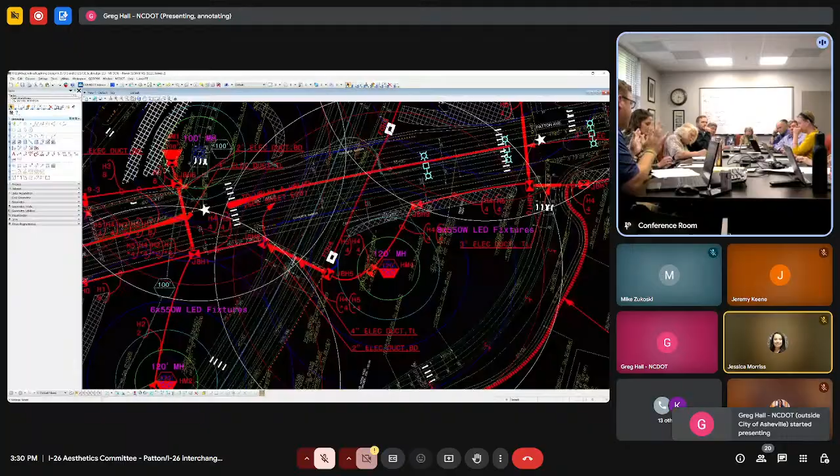We're continuing to follow up with U.S. Fish and Wildlife just to make sure, from an environmental perspective. I think we are agreeable to remove them, but I wanted to let you look at them before we did, because there's a factor if they do shed light on the MUP.

If you close your people box, it might make that one bigger. Okay.

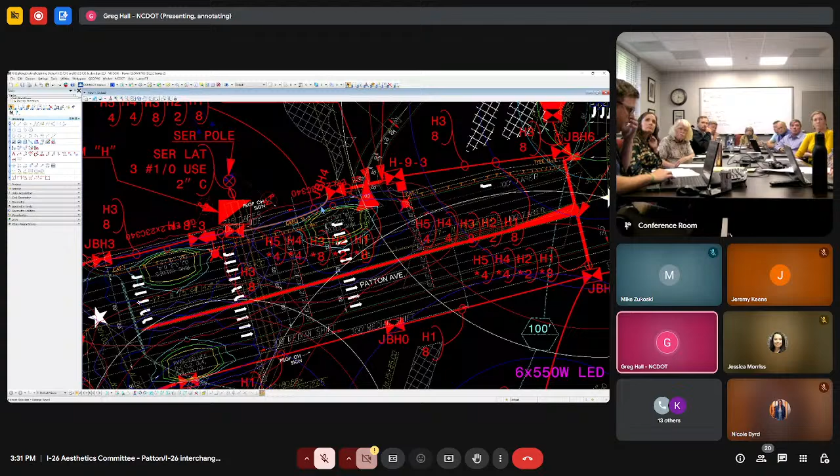So what we're looking at here with the round circles, those are the templates for the light patterns from the high mast poles. The oblong looking templates are for the single arm poles, the 45-foot ones that we're able to use. We have to use the shorter ones with a different pattern over near the French Broad.

Not there, but when we get on French Broad, or when we get off the screen up here. This gives you an idea of where the light's going to fall using the high mast poles. So I think the point of letting you see this is just to show that area of effect. It's isolated within the MUP.

Again, to the commitments that we have, we are open to removing those and going back to the single arm and double arm, which would be placed on either the shoulder of the road or the median, which would isolate the lighting to just the roadway itself, consistent with the rest of the project. Those are the poles painted green in the original scenario.

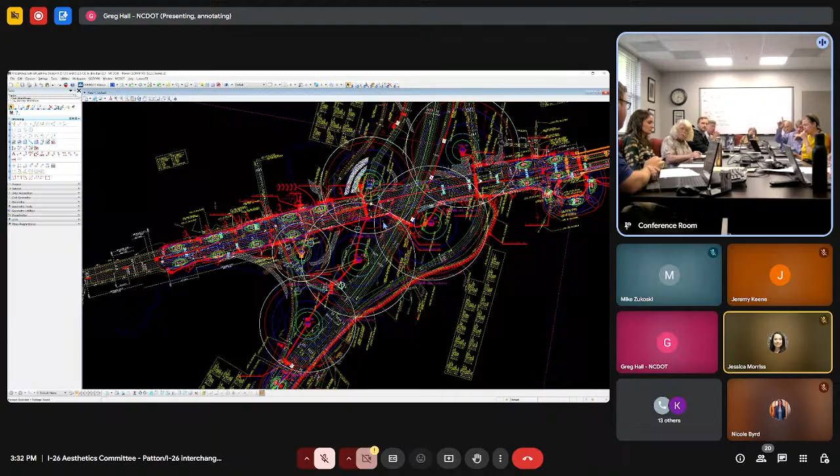So we're good. Based off the conversation last week, it sounded like the direction was away from the high mast, but I wanted to at least show this screen and the level of light as we moved into the MUP lighting conversations. That was our recommendation in the final report from our original study, to eliminate any high mast lighting where we could, preferably everywhere.

And I think that recommendation would probably still hold with our committee throughout the project, whether the bridge is under, over, whatever. I understand what you're saying about the MUP, but elsewhere in the MUP, we don't have high mast lighting. Correct. And, I mean, where do you draw the line?

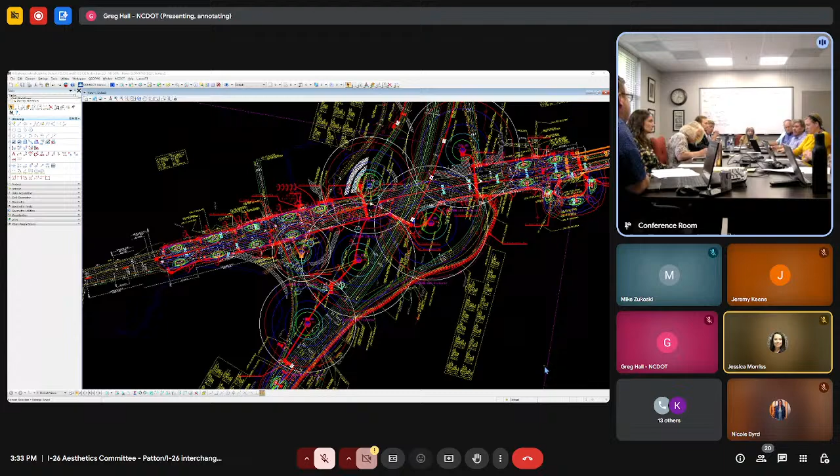Just to understand, that was a question I had reading the report from 2023. The MUP was lit with fancy Macintosh lights every 110 feet. So I saw that, and I thought, well, is that gone? Is that still in? Because that's lighting for the MUP, separate from this discussion.

Greg, can you outline where that MUP lighting is and isn't?

Yeah, so what we had done here, this thick red dashed line is where we were putting conduit in along the MUP for the future lighting you're speaking about. The MUP that was going along up here within the interchange, we weren't going to do separate lighting for that because it would have been lit with the interchange lighting.

Now, under the structure, we would have to put some lights under there to be able to light the MUP. But outside of the structure, the interchange lighting would have been sufficient for it, and likely still would be sufficient when we switch this to singles.

So the lighting and the conduit currently would be in the greenway that goes from Patton to Haywood. Currently in the plan, we're not showing it continue along Patton. We could — that's again a recommendation we can consider from the committee.

No, I'm just thinking, there's that paragraph in the 2023 report that simply says the MUP is lit with poles every 110 feet with fancy nice lights. And it doesn't say where, it just says that. Right, it's specific to that one.

And again, from an agreement standpoint, it's a municipal agreement — conduit under the project, and then lights later by the city in agreement with Duke. Yeah, I heard the word future lighting. So those are the Duke installed, maintained ones.

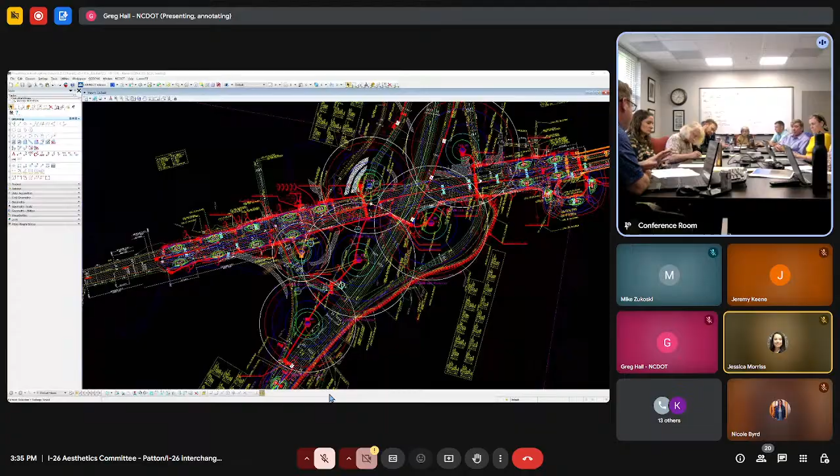There is lighting currently planned on the structure itself underneath for the roadway. We've evaluated from the department perspective, we can install that same lighting back to the MUP and the sidewalk on either side.

Greg, do you want to show what those lights look like? I can, give me just a second. I actually had closed that file by accident, I'll have to get it pulled back up. We can show you what that standard looks like.

Those are the lights that would be attached to the cap of the structure itself. There are lights on the roadway side pointing to the roadway, but we can additionally include them on the MUP side. That is something the department, from a cost perspective, is willing to cover, so not something that would be affecting the budget. To get totally nerdy, those are surface mount high bay LEDs.

Okay, which I can't get nerdy with you, but Greg can. Have you had any experience? Some lighting people that knew what I was talking about. I would envision this something similar to what's under Broadway right now, Broadway and 26.

I think that's what we had talked about in these committee meetings prior, was using a similar fixture to what's there today. So what Nathan's talking about, we have the lights shining on the roadway now, and we would put on this side another luminaire opposite where these same three are to light the MUP that's going behind the structure or behind the pier.

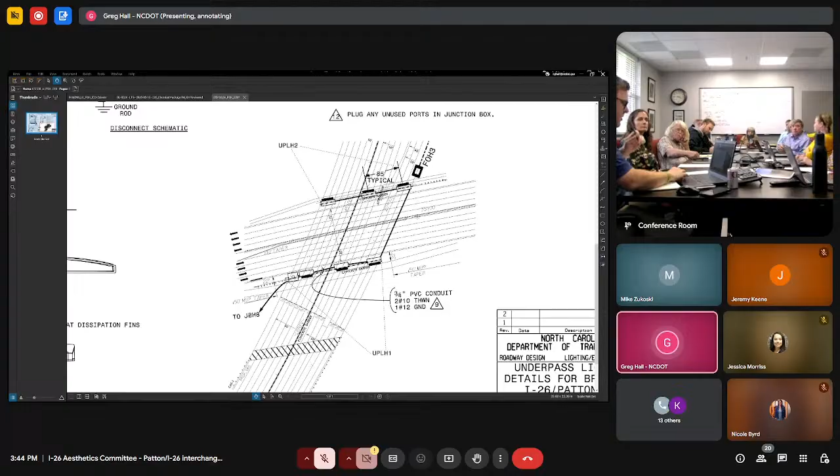And you saw an example in Charlotte. So I did—do you want to go there next? Any other questions on lighting? I have these pictures pulled up, Greg, that you sent me. I can take the screen, or if you've got the pictures handy, I'll let you show them—it'd probably be easier. Okay, I will take over.

This project was done back in 2012 that he's going to show, so it's been a little while. Things may have changed over time. I don't know if these are actually still in service or not, but they're still there. I can see in Google Maps that the lights themselves are still there.

But there's potential there, and these are color changing, so you could create a sense of place more than just high bay lighting. For sure. Although if they were red, they'd gain a reputation. That would be really silly.

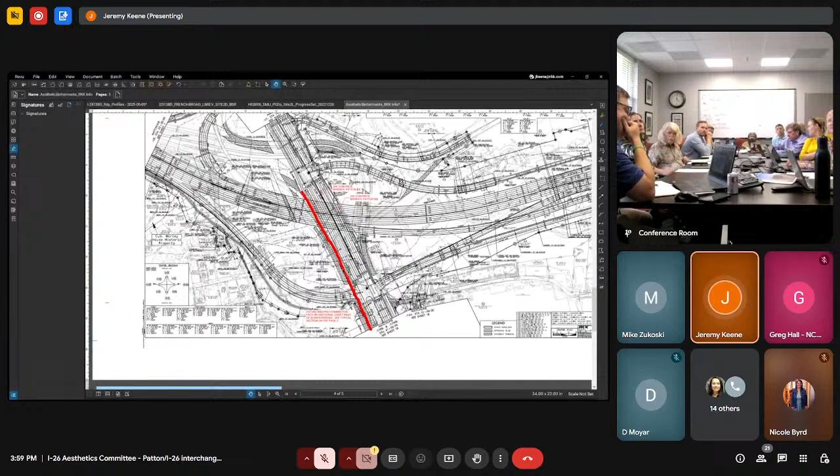The current plan shows a 14-foot MUP, and we're basically carrying an 18-foot from the western edge of the Bowen Bridges, and then carrying it westward across the ramp and then underneath the bridge, terminating it just prior to where the existing bridge is, where the Y7, the southbound ramp, ties in.

Again, when you get across these bridges, I think you're going to have a bigger effect, you're going to have to increase your fill to tie in this MUP to make this wider in here. So this was kind of a straightforward addition from this point back to the bridge.

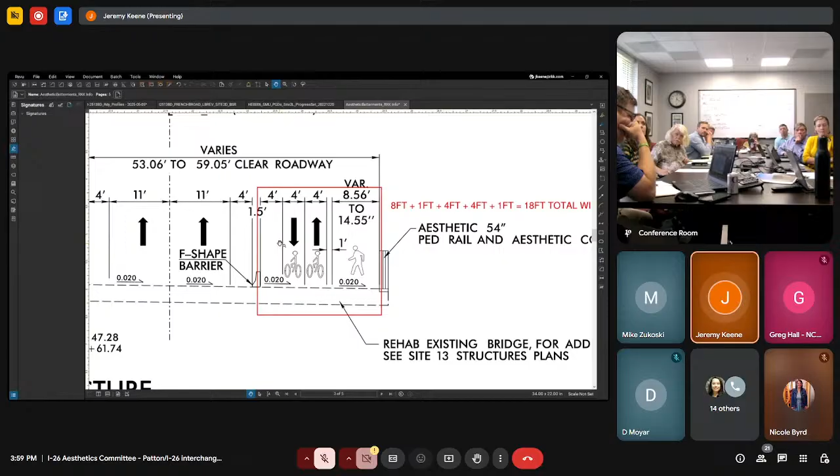Typical section, we were attempting to go basically just what you're seeing here. We're given an 8-foot pedestrian walkway, a 1-foot buffer between the peds and the bicyclists, carrying that 4-foot, 2 lanes, and then also a 1-foot shoulder beyond this outside lane. So that would be very similar typical section to what is on Bowen Bridges right now.

The planters don't show there. Planters will go on the opposite bridge over here.

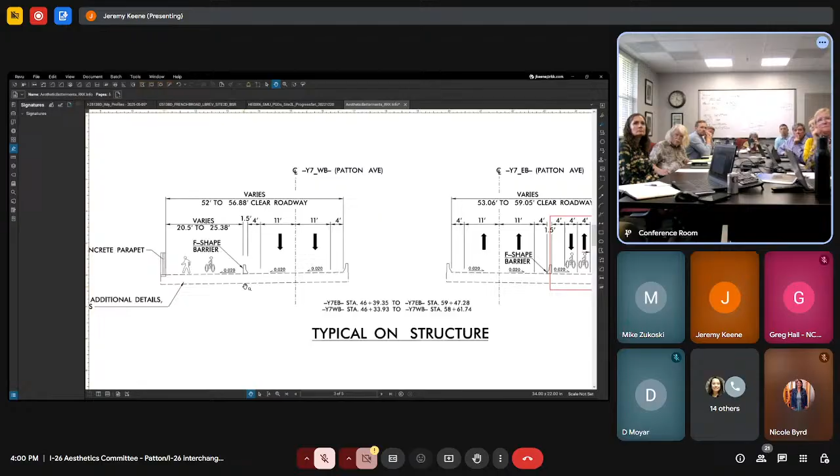So one is an MUP and one is a cycle track? It's the combination of both. So on one side, there is no cycle track. On the southern bridge is the MUP and the cycle track. On the southern side, there's no planters. On the northern side, there's planters. Correct, yes, okay.

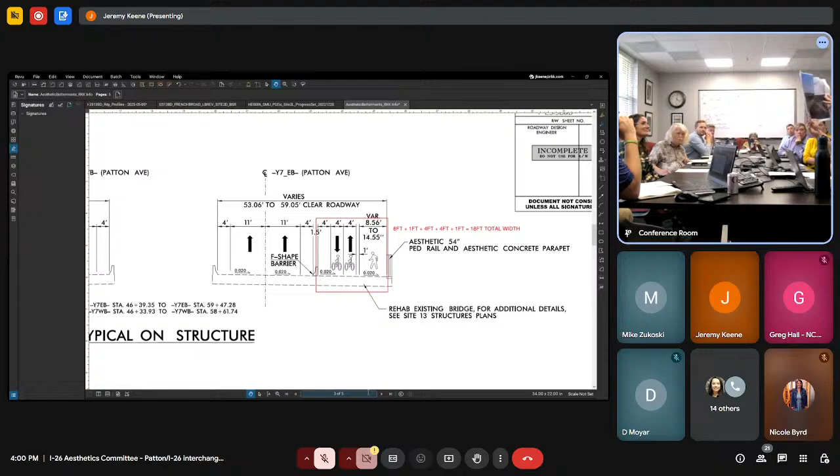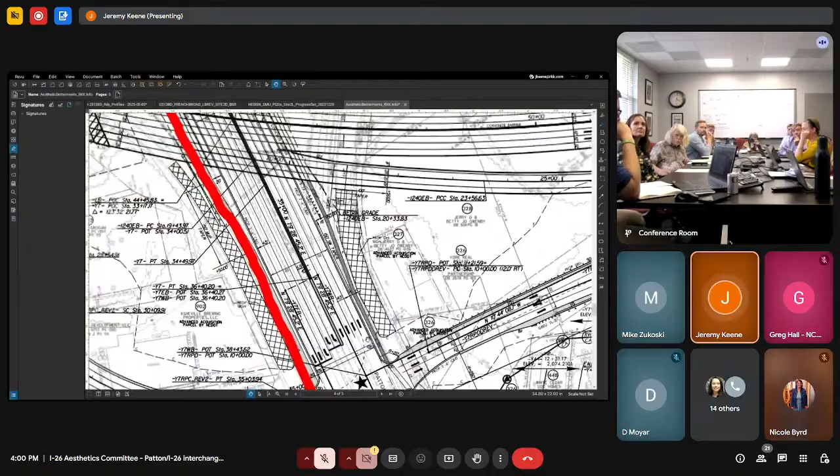And the width on the northern side is not 14 feet, or is it? So on the northern side, we have a 14-foot MUP coming off the bridge, and then coming off the Bowen Bridges, it transitions basically at the end of where Cliff Street currently is, and switches to a sidewalk running westward. So you can kind of see here, this is where our on-ramp is, and this is the transition from MUP to sidewalk.

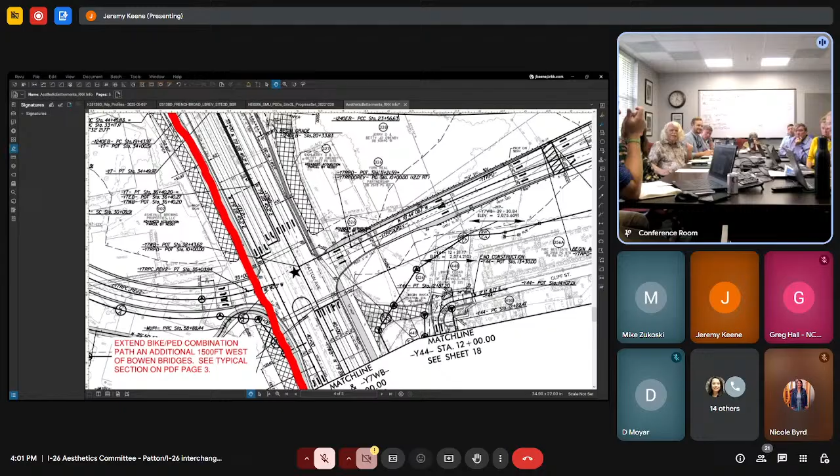So did you put a cost estimate together for that? We did. Do you want to know? That's what I had pulled up, but y'all wanted to see the express, it's just a number. Big number or little number? It's 275,000.

So there's a caveat to that. We're going to continue to evaluate that unless it's something the committee wants to move away from. What we still need to continue to verify is there will be potential utility impacts to that. Pushing that wider out will affect Duke's PUE, so we'll have to continue to chase that and make sure it doesn't impact anything additional. The length of that extension?

Jeremy, could you give us a length? 1,500 feet. Thank you. To end up where? It's to extend the 14-foot MUP out further to include the cycle track that's on the bridge, continuing the cross section on the Bowen bridges all the way through. Oh, I didn't think we had cycle track. It's not a full 24, I think they were showing 18, but I think that's what the estimate is. We could go, which is, we can maximize our width.

The idea comes back to taking the space available with this option with the bridge over, because the MUP is now under and not on top of the bridge, so we can make it wider with that space to extend the cycle track. That partly came from Mike's suggestion last week.

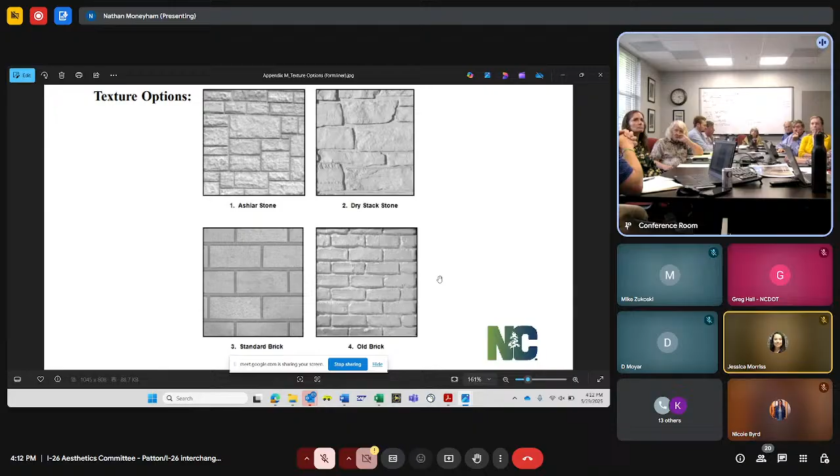From talking to our structures folks, there are all kinds, basically if it's available commercially, other patterns, and the chevrons mentioned last week, we can do that. But if there's additional cost associated with a specific pattern outside of our standard, we would have to split that out and talk about it as a betterment.

Doing one of these would move away from the idea that's been brainstormed of doing murals on these spaces, right? Because you wouldn't want art over these. We're talking about the columns though right now. So columns could, like on Lexington Avenue, those are on the columns. This would cancel out that option. Yes, and it could be a combination.

Again, that's our estimate, and we'll share this with the committee as far as we've got it broke down in portions. You could just do the barrier and not the columns, or just the cap and not the columns, or vice versa.

The columns, are we just talking about the facing part of the column having the formliner all the way around? For each of the columns or just the one? For each. For the barrier itself, we would just be looking at the outside that you would see from Patton.

And while we're talking about it here, we have another estimate, and I think this is maybe what will end up going back. What direction we need from the committee is what surfaces you'd want it on. We also have an additional estimate to do the non-traffic side of the barrier along Patton, this barrier here, so you could also include that on the back side, meaning the multi-use path or sidewalk side of those rails.

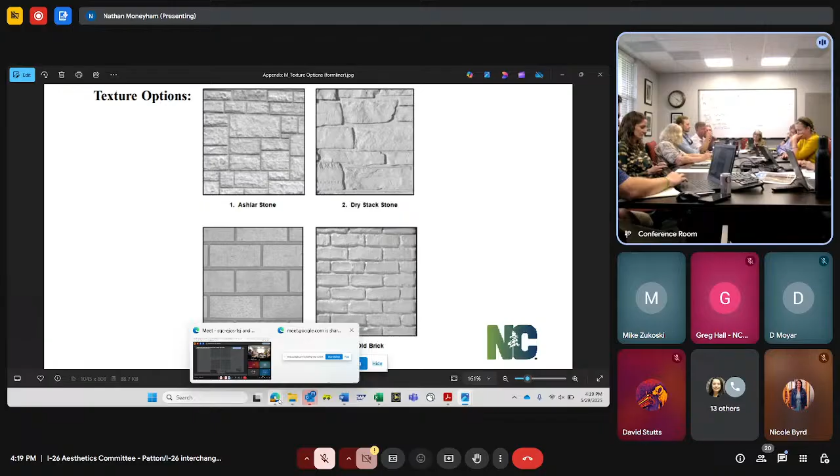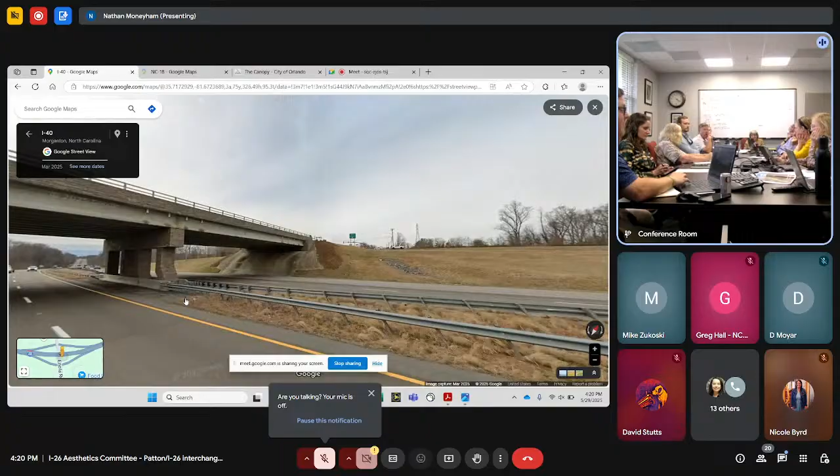So endless possibilities. I just Googled form liner and images, and there's a lot. Lots of really nice ones, but I guess some of these look really custom when they aren't. They're pretty standard off-the-shelf. There are thousands of off-the-shelf ones. From a cost perspective, we probably would not go that route, and we can start pricing it.

What's the view here? Not all of it has to be that way. What's visible is the girder. If you go back to the picture, what about the wall, the slant? The cap is nice but you don't see much of it. The column is nice, you don't see much of it. The main thing you see is the girder.

We've had extensive conversations about that in the committee, and the conclusion we arrived at is that particularly if we're using a form liner that mimics stonework, we want it to appear authentic, given that there are limitations to how authentic it can actually appear. If this were a bridge made out of actual stone, you would not see a span like that being constructed of stone. So what the committee has recommended is that the span remain plain concrete, and that only those elements of the bridge that one could conceive of being built with stone have the form liner application.

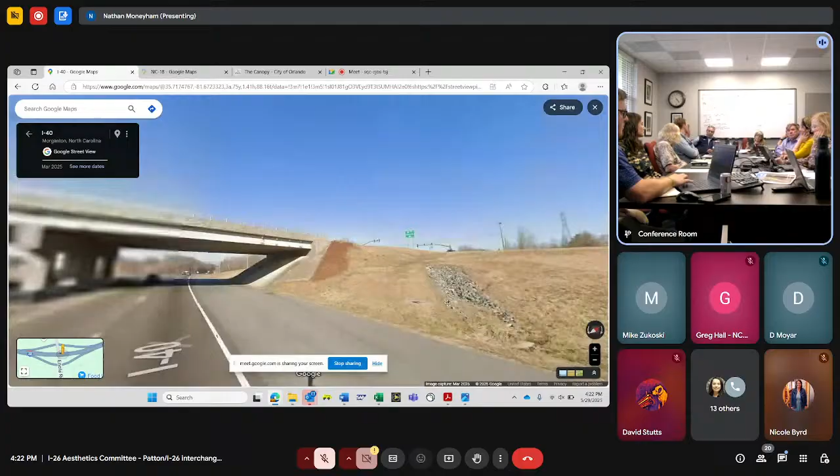And as this is the Patton Avenue Bridge coming into town, it may be that you don't go with a natural looking stone and go with something more urban. Maybe it's just shadow boxing in that upper rail, because you don't even have a rail on it to break up that surface—it's just a solid mass right now. If you did simple shadow boxing or picture framing, chevrons or something people talked about, because you also get to the bridge which has those Art Deco light elements. So if you played more with either a deco piece or even just simple shadow boxing, instead of going with something trying to be natural since you're getting closer to an urban environment, that might be something the aesthetics committee might want to look at.

Right, I think that's one of the challenges we're going to have—we're looking at all these different elements, but at some point we need to step back without getting into a lot of detail and say, what do we want that thing to really look like as you go through there? What's the general impression you want to make on people as they come through? The form liner, I think, is absolutely the right thing for the interstate, because that makes the kind of statement we want. Here, I think we're looking maybe at a different setting, a different situation along the lines of what you were just talking about, where it's a little bit more artistic.

So that would affect things, and it doesn't necessarily mean we have to have all the elements in place now, but at least if we could set it up so the city could add things later on, like an art wall or that kind of stuff. Begin to look at some of these elements in terms of a general concept of what kind of impression we want to make as you pass underneath that thing.

I think what I'd like to do is bring this back to our next meeting, so that the committee members and other stakeholders, if they wish to contribute, have some time to explore the options—both in terms of what kind of form liner we want, and the elements we want to see put on it. We may very well want to preserve some space that is not treated with form liner, so that we can do some public art there. So let's return to this at our next meeting. Okay.

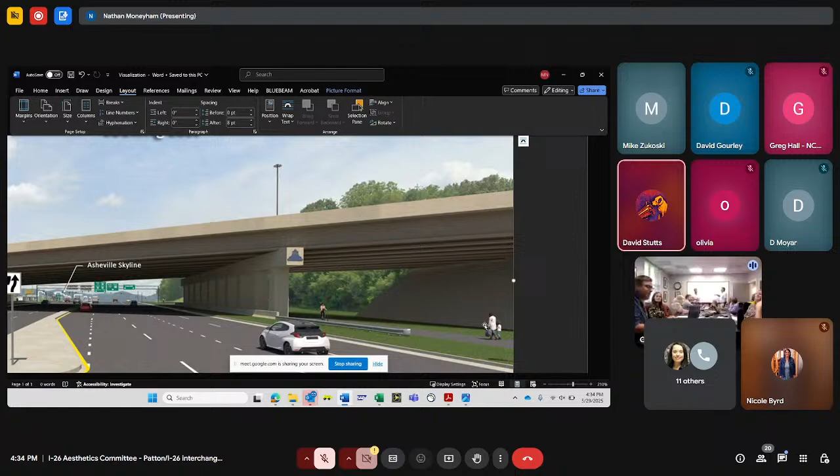Here they come. Okay, can y'all hear us online now? We had—there's a user error, not really a whole lot. Yeah, no, it's this whole face—on the height of the bridge, so it'd be this face that you would have.

Yeah, so underneath, just coming here—you've got this entire wall face under the bridge, whatever the bridge width is above it. You're talking not facing the traffic, the form liner, but under the bridge as the pedestrians would see it. Yes, pedestrians walk by and look to the right, or left in this case. Got it—so instead of this being angled, you're talking about pushing it back flat.

So I don't think we would want form liners there because we want to definitely preserve that space for public art. I'm just wondering what the research from other cities shows on the potential for use as a loitering space, an encampment, whatever, from having that additional space. I understand it could become an asset, but it could also just be more space for people to hang out and make others feel uncomfortable walking under the bridge. So I'm wondering what the research shows.

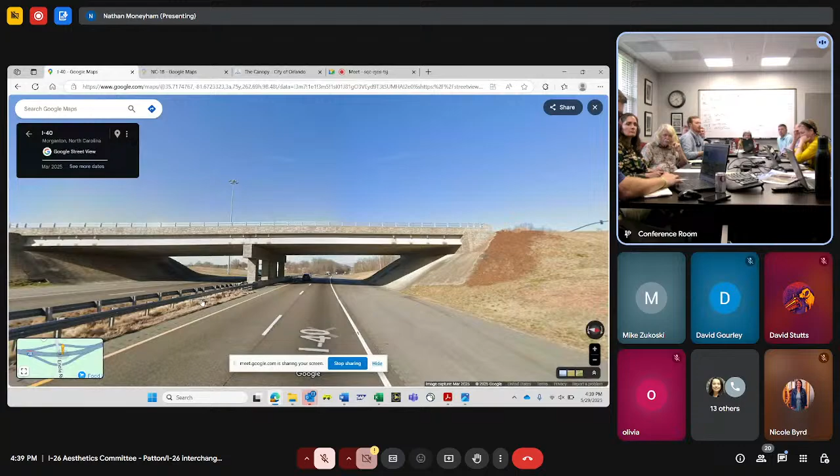There wasn't a significant ledge in your picture. There it is - there's an abutment where the beams sit, and it probably sticks out like 2 or 3 feet past where that is. And then there's a ditch, so you've got drainage purposes - you gotta drain the water, a couple feet in between the face of that wall.

And then I went back in time - there you go, there we go. So this is a combination where you've got both, kind of a split wall. In the case we're talking about, we would take it all the way down. And again, the panel size could vary, but you see there's a ledge with a ditch.

But it looks like the only accessible way to it is from the top or with like a grappling hook or something. Sure, not easily accessible. I'm sure if APD was here, they would say there are certainly somebody industrious will get out.

But I think Sonia's point is really good, like what's to say they're not just going to camp on this now, really wide area that's still there unless we come up with activation ideas. But I do think there's value to the straight up and down if we can claim more space for people to be activated. Correct me if I'm wrong, but would most of that space be the cycle, if we went with the cycle track plus multi-use path?

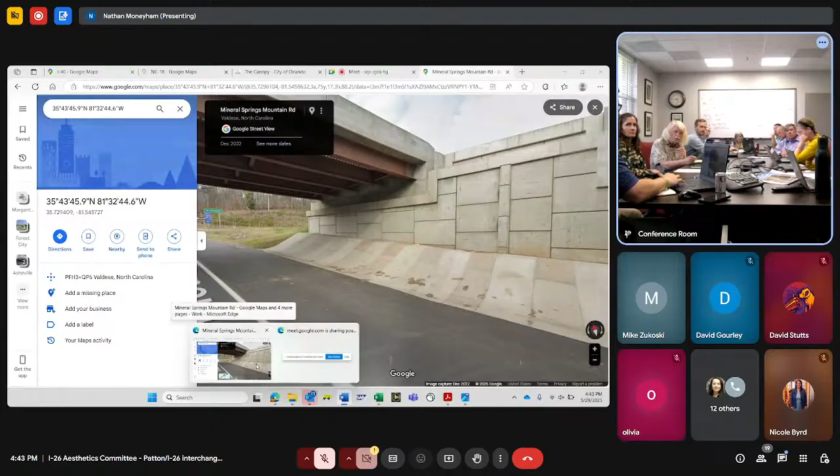Can't you match the formwork that you're going to put on the beam, on the columns? On the steel rail? No, on the concrete rail, on the backside we can blend it in. I think we're looking at from a crash standpoint, that precast slope that's required for the single slope is the issue.

Well, we can continue to evaluate that. I think again, as far as coatings, it's definitely an option. We can look at it from a cast-in-place standpoint.

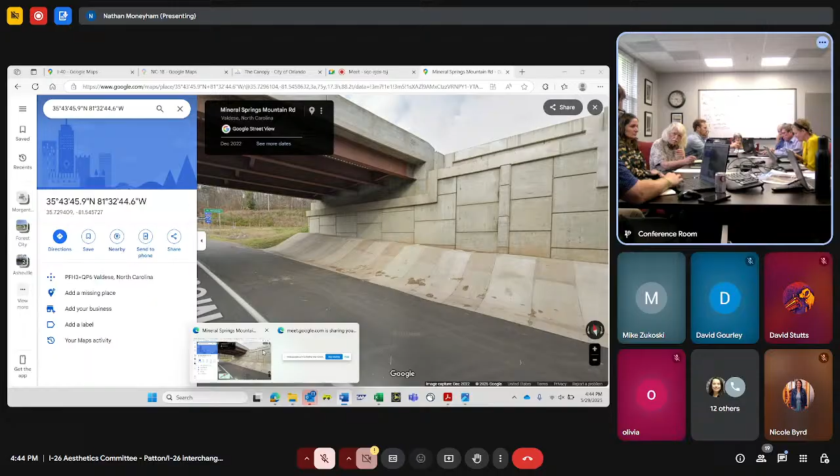Is there a preference if the rail could be aesthetic, or if the concrete rail could be aesthetic, to eliminate the steel beam guardrail, or is that something we don't need to chase? Meaning if all of this, would you first see all of this concrete rather than transition from steel? I think it would look better to be consistent, one long strip as opposed to three sections, metal then concrete then metal. To me, if it could all be concrete, it would just look better.

And then you said on the backside we could have it textured. Yes, we'll run an estimate for the back side of that. The front side, we have to do a little bit more investigation just from a traffic facing perspective.

They show one in the NCDOT pattern book, that's what I was picking off of. Is it on the back side of sidewalk? No, it's that AGM manual from NCDOT. Okay, so that's what I was seeing.

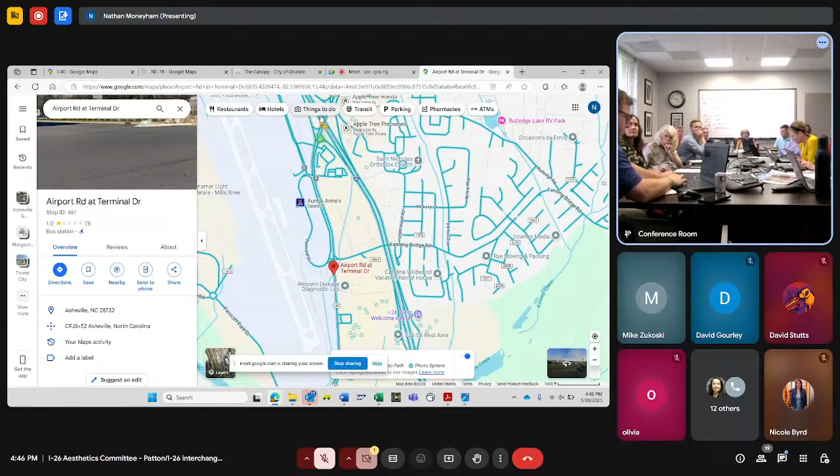We can investigate a tapered end to it like that. There's a car in the way, but rather than a standard guardrail attachment. How tall are those typically, Nathan? The barrier is 36 inches, yeah.

I feel like a lot of times I see the steel guardrail and it's dented and waiting to be repaired, you know. Yeah, my feeling is that guardrails are inherently ugly.

So this would get broken, but you can just pick up the section and replace it? No, these are cast in place, poured in place with rebar. So you can fix it, but it'll be a larger repair. Interesting. You can fix it, but they still get hit as well, and chunks fall out.

One thing to think of with the two options, and I'm not saying one or the other, but the guardrail does have some visual permeability through it. If that makes a difference to think about seeing pedestrians on the other side, if you want eyes, you essentially got a 3-foot wall that you can't see through. Again, there's pros and cons. I can see it both ways, but that's something to think about between the two options.

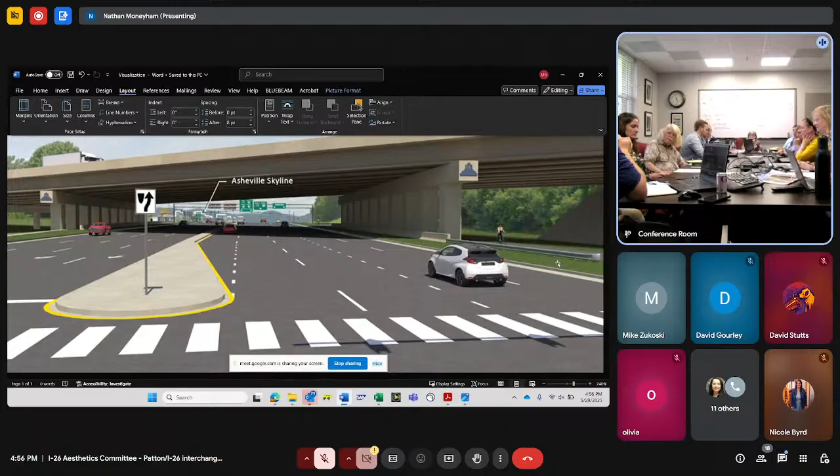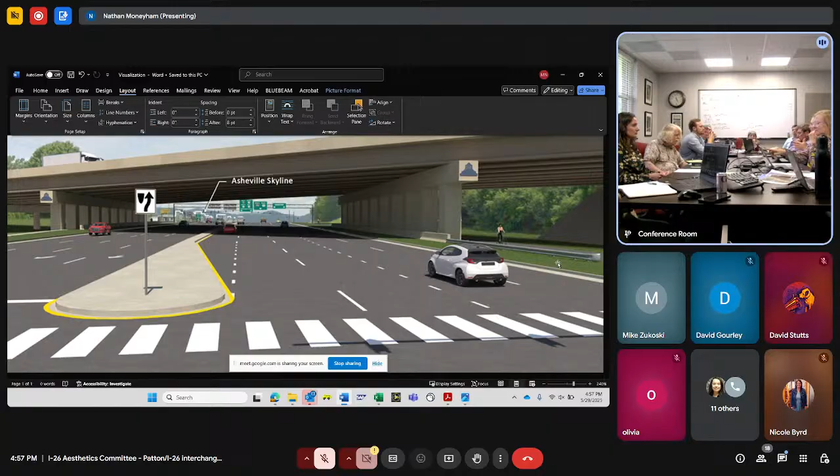I do think there is kind of like a fork in the road of whether there's a straight up wall or a slanted wall. And if there's ideas that are fundable, or that we can pull together with a vision where it can be activated if it's a vertical wall, and we have something that's meaningful and not just like lipstick on the project idea - that's kind of the fork in the road, because to me it's kind of like, what's the safety experience?

What's the experience? Are we creating a place or not? There might be benefit to keep a slanted wall if we aren't really going to activate something. So what happens is a question mark, but I'm going to spend more time thinking about that decision of vertical versus slanted and the potential for really placemaking, or if that's not possible.

The other point, which Mike Zukoski made at our last meeting, is the visual aesthetics of a vertical wall versus a slanted wall, the urban versus suburban feeling of it. I think that is very important in terms of how the experience goes. And yes, we need to try to activate that space underneath the bridge, but my personal opinion is that vertical is much preferable to the slanted wall just on its own merits.